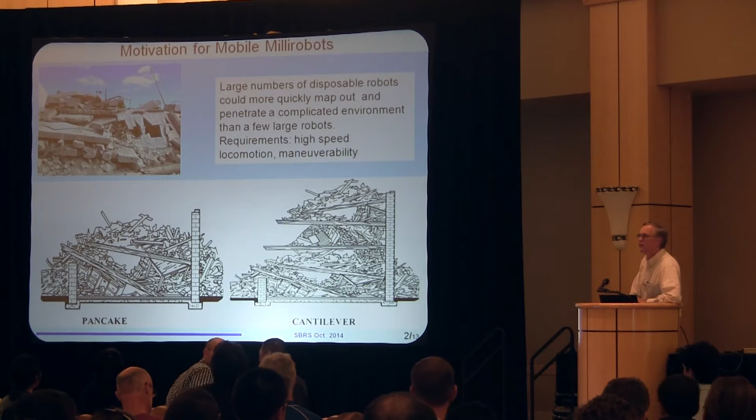We're a long way away from doing anything as complicated as that, so I'll show you the maneuverability we're working towards in the plane. We've got a long way to go.

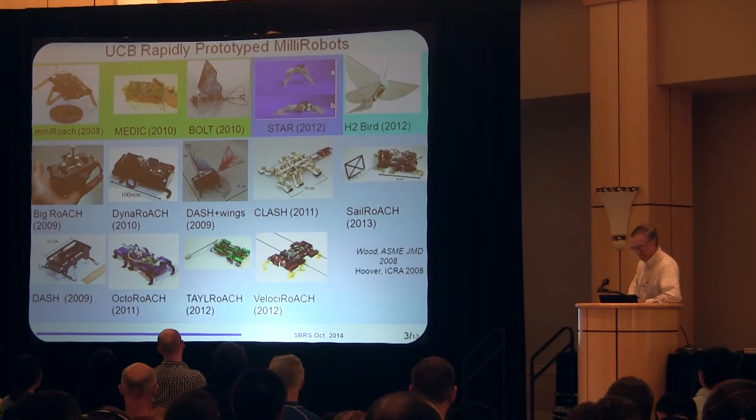We've been building a large range of designs of robots in our lab at Berkeley for several years. Just some pictures here to show you some of the devices we've made. We've got an interesting process for manufacture - it uses laser cut sheets with lamination, and we can build pretty much any planar kinematic structure we want and fold it up into more complicated machines.

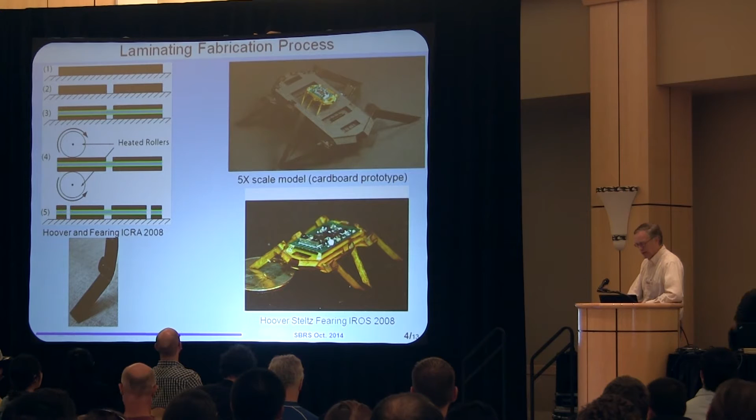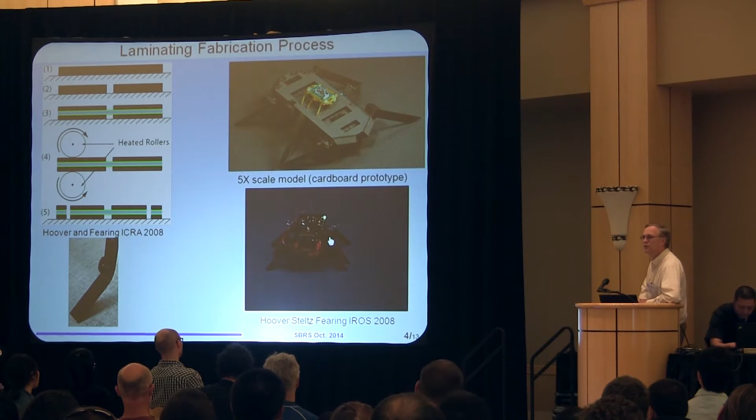It's also a scalable process, so just by changing some parameters you can build large or small robots. One of the first ones we made, back in 2008, was a little autonomous crawler, which shows you can pack everything into a very small package, about 2.5 grams. The current motor and battery and processor technology leads us to make things a little bit larger than that.

So we'll be talking about things that are more on the size of a palm. We're making some of these designs available if people want to try them out. This is OpenRoach - it's made of cardboard processing with flexure hinges. This will carry an Odroid U3, so you can run ROS and Linux and all that good stuff on it. It's available, and I think it's a $10 gearbox and $2 of cardboard, and you just put your electronics on it. You can buy the parts from SparkFun and put one of these together and get the design. It may require some hand holding, but if anyone's interested, let us know - glad to help you out.

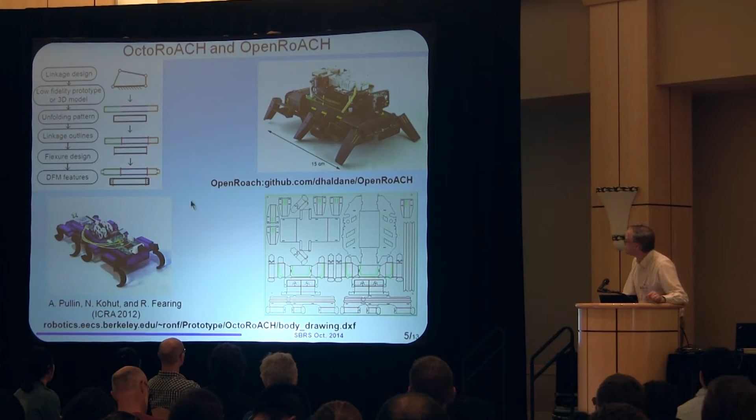And we have the earlier designs also available. So what I want to focus on today is a variety of steering methods we've come up with. We're a little bit surprised that there still seems to be a space of interesting steering modes that haven't yet been discovered. I'll show you some of the ones we've been working with, very quickly, in the remaining few minutes.

We'll start with a very simple, conventional approach - pretend the robot is a tank and drive the two sides at different speeds. That kind of works, not very well. A couple of fast methods of turning use an inertial tail, another fast method uses aerodynamic forces, so the faster the robot runs, the faster it turns. And there are two new methods I want to talk about.

One is by coupling a roll oscillation, which will generate a yaw based on the contact forces of the feet. And then, even more surprising, these robots have two motors - I'm going to show you that we can do steering in the plane with just a single motor, where the single motor controls both forward motion and rotation.

Okay, so this is from a couple of years back. You can see, hopefully it's not too dim, but the robot is turning and it's hitting a couple of discontinuities there. It's got a controller on it to maintain heading, at about 90 degrees per second. Here's a discontinuity - it hits that and recovers.

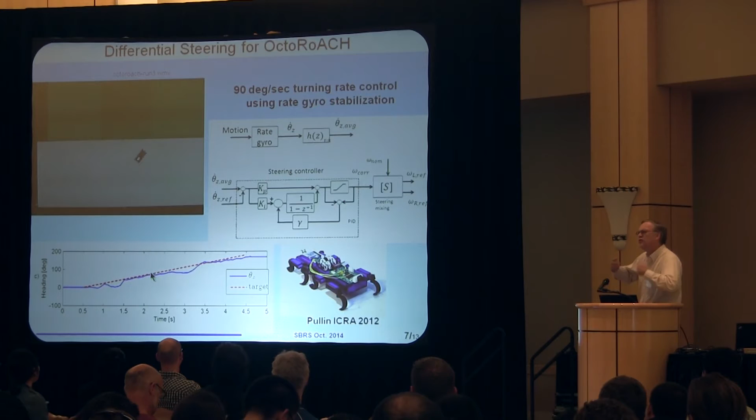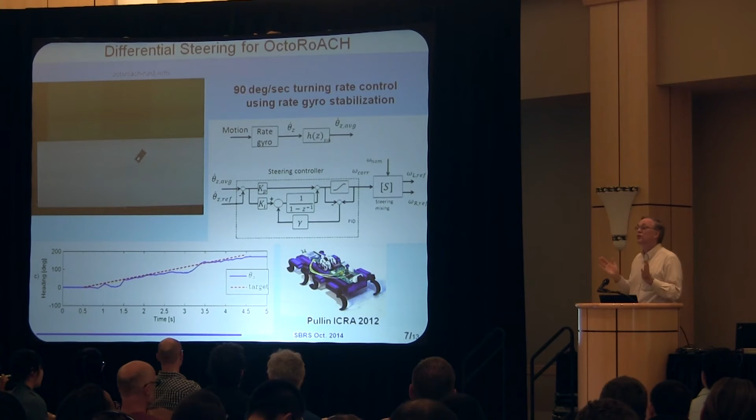These feet basically have to slip because it's doing a tank-type motion - one side is going faster than the other, which means the legs have to slip. There's only one motor driving each side, so there's no way the legs can perform any trajectory that changes based on how you want to steer.

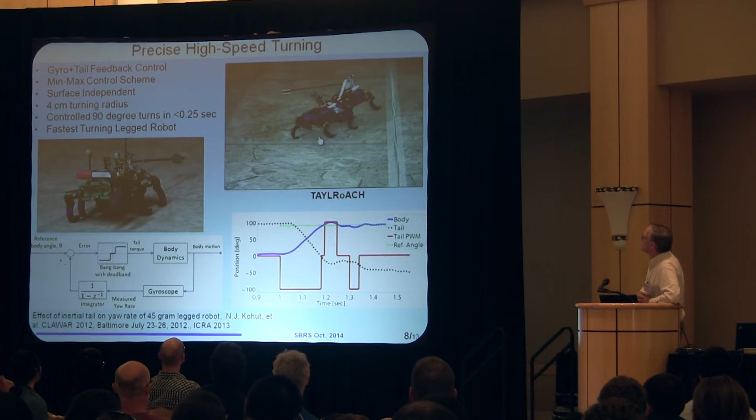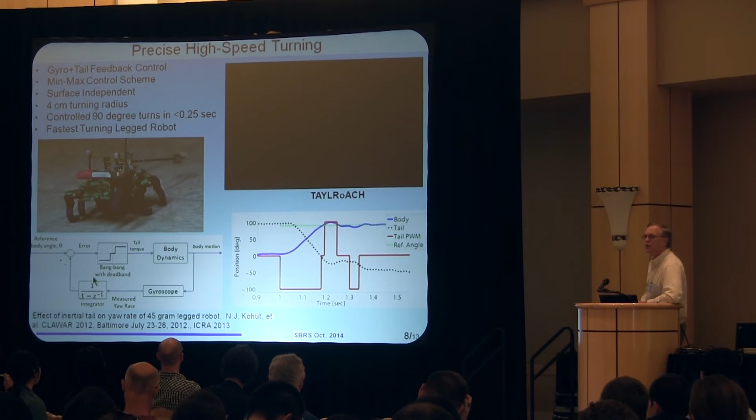So if you want to turn even faster than that, here's a way to do it using an inertial tail. You can see here this is at reduced speed - again a palm-sized robot - and it does a 90-degree turn in a quarter of a second. It'll turn while running, or turn in place. The tail is nice because it's not so dependent on the friction of the ground - the robot will turn even on ice. And again, you can put a nice little gyro controller on there, bang-bang control, and do fairly precise turns.

So another way to turn, if you're running fast and need to generate a moment, is to put a sail on the back of your robot. So just run quickly, it generates a little moment, and you can see it turns.

The nice thing about this is that most turning methods, like if you're trying to rely on wheel slip, you can turn really well if you're in place, but the faster you run, the harder it is to turn. This method generates a turning moment proportional to velocity squared, so the faster you run, the faster you can turn.

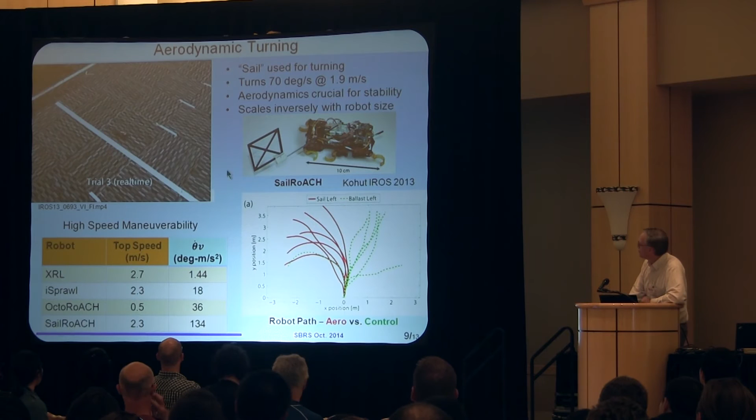We came up with a little metric—these are usually chosen so your robot looks good, but it's a reasonable metric—degrees per second multiplied by meters per second, and the robot looks pretty good by that metric. You can see the control cases here: if you just put a mass on it, it's not a mass effect causing it to turn, it's an aerodynamic effect.

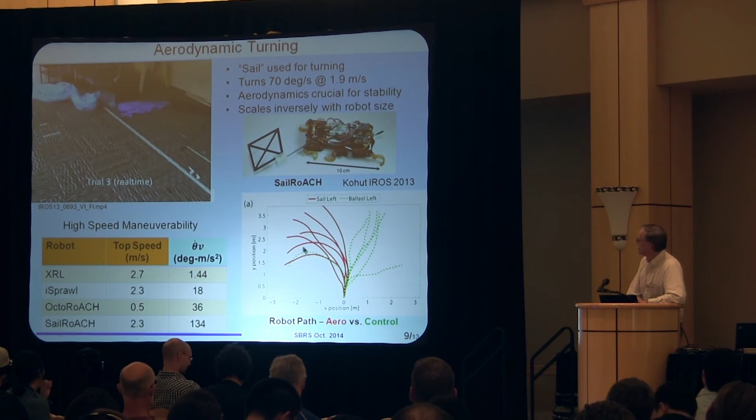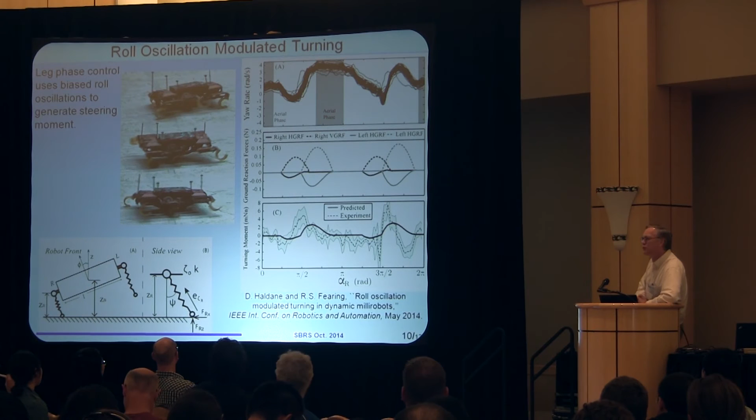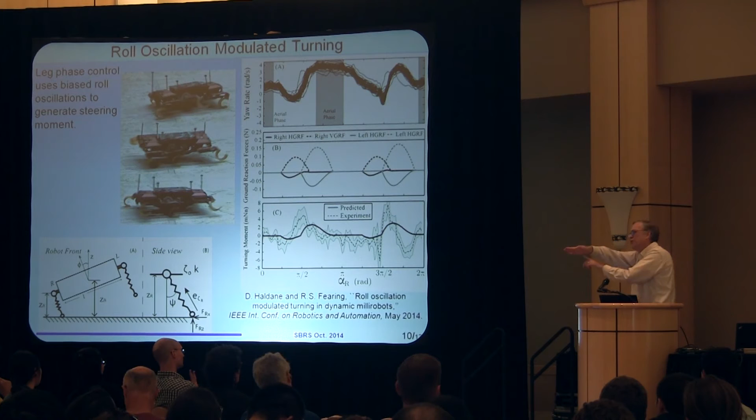Yet another way to turn: the robot is running along. This was actually found in a very serendipitous fashion from some treadmill data that Duncan and Austin had found, where the robot, with some combinations of frequency, spontaneously did a very nice turn. We did some analysis on it—what's going on is that as the robot runs along, it's rolling, and if you time the roll with the leg contact, you get a good rotation. Let's show you the movie.

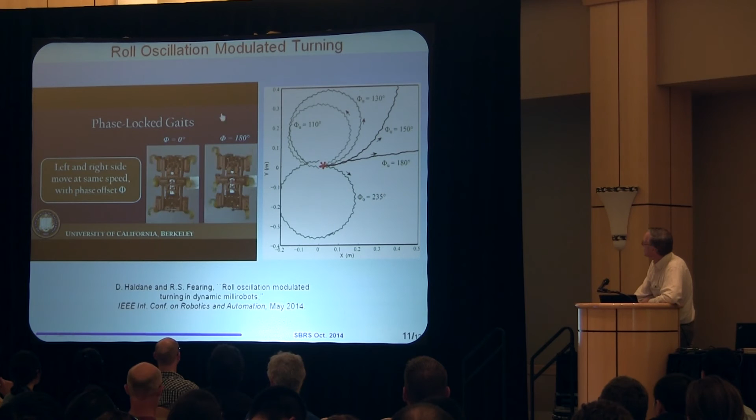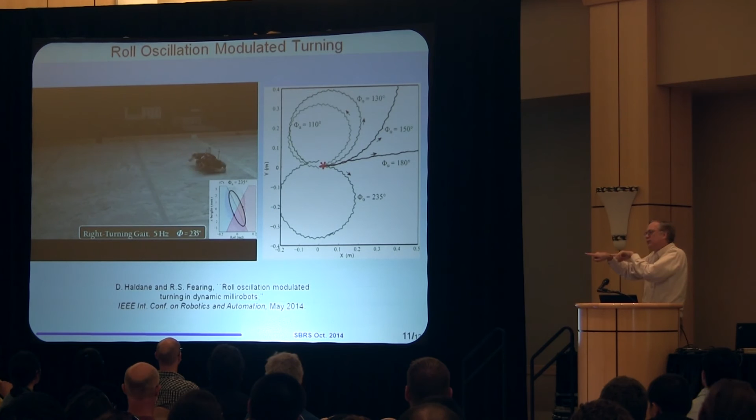Okay, so this is the robot, and we'll do a little turning while it's warming up there. Here are the example trajectories—for two particular phase offsets between the left and right sides. The two sides run at exactly the same speed, but with a different phase offset, and that allows the robot to rotate one direction or the other.

Okay, so the last thing—let's, two robots, that's too much. Sorry, two motors, that's too much, let's just use one motor, to make things a little more interesting and try to understand what's really going on in some of these steering things. It's an imbalance between the forward trajectory and the turning moment.

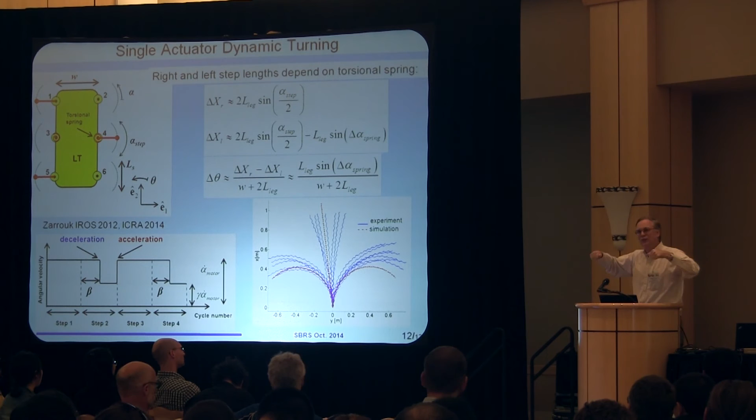So here's a very simple idea: make one of the legs compliant in the center, and if you apply a trajectory so that it accelerates while that leg is in contact, there's greater load, that leg will displace more because of the compliance, causing a contact location offset, which generates a moment compared to the legs being balanced. Let's see that—here it works.

So with a very simple leg with compliance, just by changing the acceleration during the time the middle leg is in contact, you get a rotation in the yaw plane, and you can get the robot to go around obstacles. Here are some example trajectories—so it's actually controllable with just a single motor.

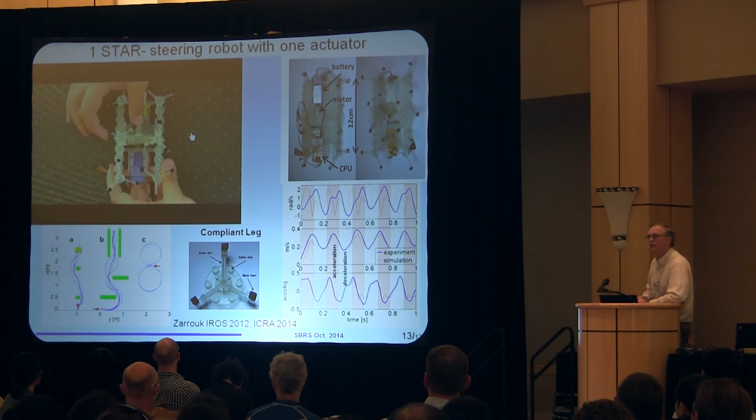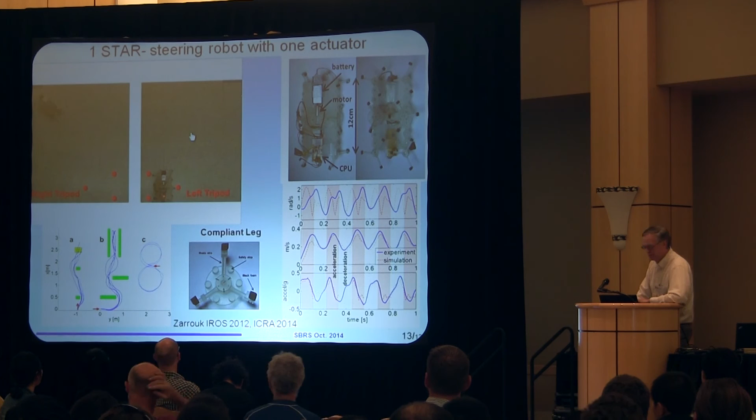There's a lot of interesting things we think from this that we want to understand: what causes robots to turn, what causes robots not to turn, then put them on very rough terrain and see how you can maintain a heading or take advantage of the terrain to turn if you'd like to. So to conclude, I've shown you five simple methods of turning, and I think there's going to be a lot more interesting turning methods, particularly as we try to run on rough terrain.

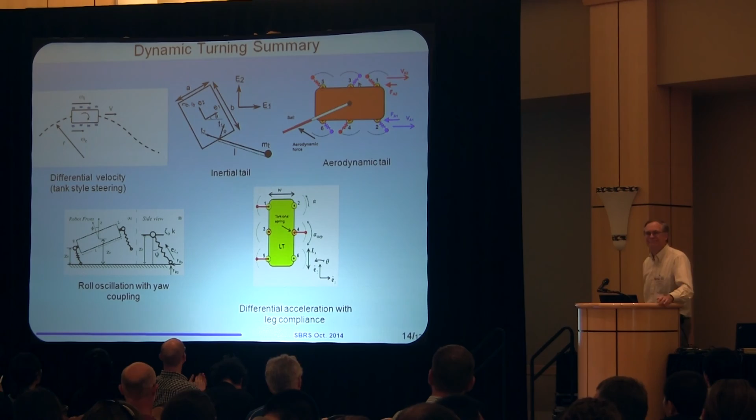I have a question. Can you say a little more about the single motor turning, and to which extent you have control to turn how much you like and in the direction you like?

Yeah, it can turn either right or left just by changing the timing, so that the center leg will bend more or less, and so you can turn big circles, small circles, left or right.